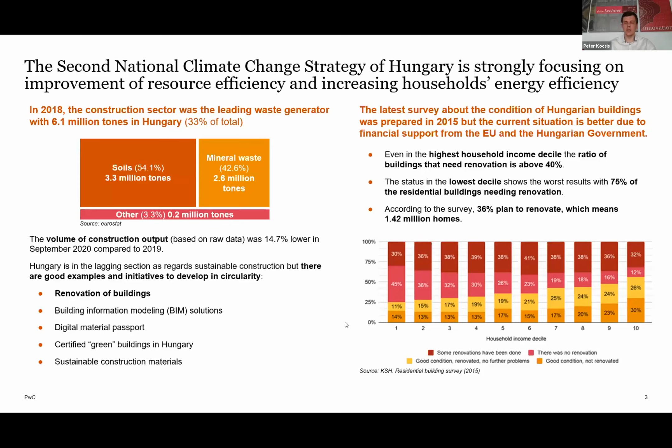In my last slide, I would like to highlight 3 potential market opportunities. Unfortunately, I would also like to highlight that the Hungarian construction sector is very cost sensitive and looking for cost-efficient solutions. So first of all,

if we're speaking about green building design, then we should also focus on cost efficiency. Those architects who have experience in BREEAM and LEED compliant designing could find those solutions which could release or decrease the capital expenditures. So it's really important to find those architects who have the relevant and enough experience to find green and cost-efficient solutions for building designing.

The other one is sustainable construction materials. As I mentioned, there are good examples and good practices regarding sustainable construction materials, but I would like to highlight that this market is in a very beginning phase.

I would like to just highlight one example. For example, MOL, the Hungarian oil and gas company, is producing rubber bitumen, which tries to recycle those used tires which in the other solution could be put into landfill. But in this case, they can produce higher life cycle bitumen which has better conditions and parameters.

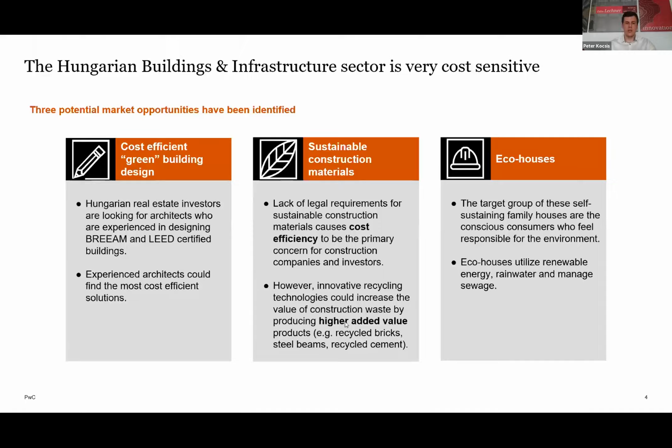So thank you very much. It was really just a brief part of our market analysis. I hope you found it useful.

Many thanks, Peter. Thank you very much for sharing those highlights. We could hear you talk about tremendous opportunity, because when it comes to the construction business within Hungary, there is just so much space for improvement. You made it very clear that it's also a cost-sensitive industry, especially when we're talking about households. At the same time, you mentioned some interesting figures, that over 35% of households are really planning on renovating. Money is available based on the funds from the European Union, but it's going to be also very crucial to find the right partners.

And the main opportunities that you highlighted are green buildings, so all the different certifications, how to make it more environmentally friendly. Then we heard a lot about space for improvement when it comes to green materials. And last but not least was definitely, especially for households, eco houses and opportunities and ideas over there. So thank you so much for highlighting all of that.

I'm also going very quickly through the questions, and there is an interesting one from Barry, who's wondering - you were talking quite a lot about households - is there also an opportunity for the industry, so commercial spaces, factories, and so on? Do you maybe have a brief insight into that, Peter?

Yes. We have some clients - not a huge number, but several clients - who are really trying to have these BREEAM and LEED certifications for their industrial buildings.

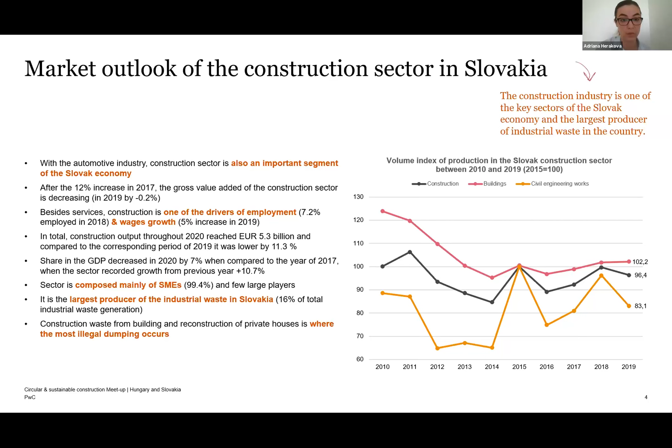I'm now moving to another slide. In the next 2 slides, I prepared some main points regarding sustainability practice in the construction and building sector. When looking at the sustainability trends, we can state that the sector in Slovakia is lacking in innovation and in use of recycled construction materials. The use rate of them is very low, below 10%, as you can see, and the recovery rate of construction and demolition waste is also very low, only 51% as of 2018. Also, as you can see in the graph, there is a huge lack of data regarding these kinds of groupings of the recovery or circular material use rate. So that is also one of the big issues which is not helping the market.

Traditionally, the construction sector in Slovakia is more conservative and less open to innovations when compared, for example, to the one in the Netherlands. So far, recycling construction material is not a major field of interest. The main overall barriers for these recycled materials usage is oftentimes price, which is higher many times than the price of native raw materials. Then there can be quality issues and the reluctance of planners and contractors to apply these recycled materials. So it's still a very traditional market, but it is changing.

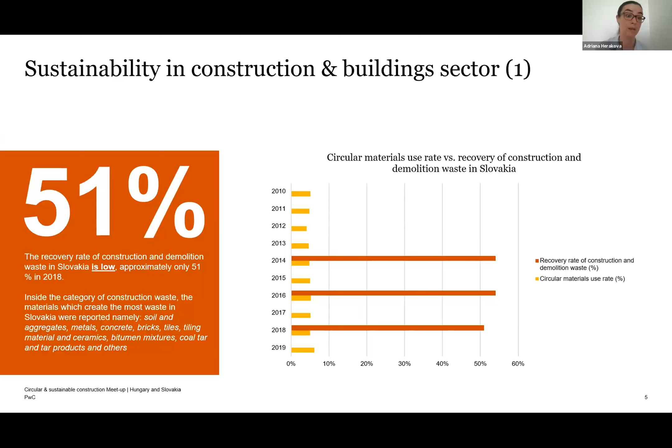When we move to the next slide, as already mentioned, the renovation rate of apartments and family houses is above average compared to EU countries. The country has been pursuing ambitious renovation programs for multi-apartment buildings, public buildings, and additional measures also focusing on family houses, such as insulation, etc.

What are the main obstacles? Oftentimes low income, low awareness about energy renovation, and lack of advisory services. However, policies are trying to support more and more the changing of opinions or the status of this.

The National Energy Climate Plan of Slovakia estimates that by 2030, 3 billion euros will be needed to renovate non-residential buildings, out of which 1.2 billion will be needed only for public buildings. So together with the Energy Efficiency Recovery Plan, they present a significant opportunity for action, which will be mentioned in a following slide.

Also, in terms of overall digitalization and data application usage, the construction sector is underdeveloped. I picked one example: only 13% of Slovak companies in the construction sector know and actively use BIM processes in their planning or construction processes. However, some private investors and developers in Slovakia are already using these advanced methods and technologies in their constructions.

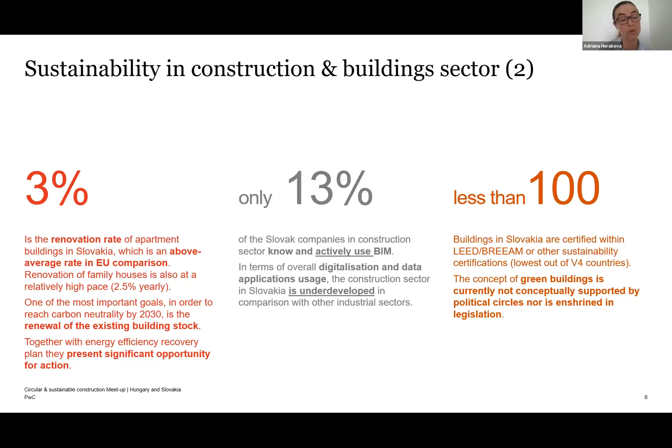When comparing Slovakia with other V4 countries in terms of green building certifications, Slovakia is at the lowest position. The concept of green buildings is currently not conceptually supported by political circles, nor is it fully enshrined in legislation. So also here is great room for improvement.

These are basically a summary of identified opportunities, not only but major, which came out after our market study. The first one, as I was mentioning, is the importance of disposal and recycling of construction waste. The development of new waste disposal sites with advanced recycling solutions will be required in Slovakia, as more waste, and construction waste especially, is expected to be produced. There is high demand for living space in Slovakia, and there are new constructions, so this is one of the areas which would be very important.

Second, we consider including knowledge exchange, especially in order to improve advanced technology usage, classification, and certification of buildings. This knowledge exchange should work especially between architects, investors, contractors, and municipalities, and of course between Slovakia and the Netherlands as an example and as best practice.

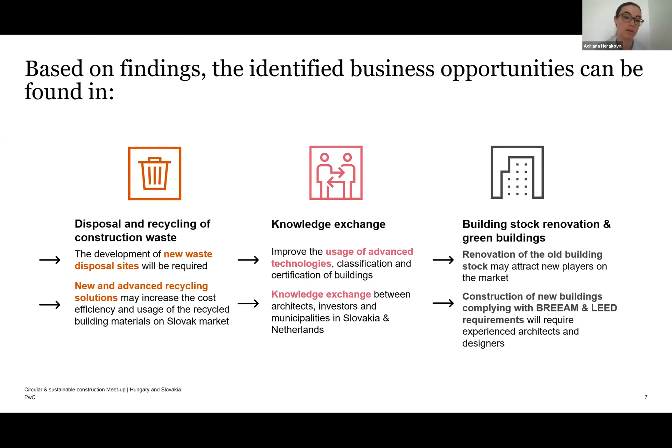And the third big opportunity lies especially in the renovation of the building stock and energy efficiency recovery plans for buildings. This is similar to Hungary. There is a need to renovate the old building stock and construct new buildings complying with BREEAM and LEED certifications. These BREEAM and LEED certified buildings are now currently being constructed more as office space, especially in Bratislava. So it is still not on a big scale; there are only a handful of projects like this in Slovakia.

And my last slide here, I pinpoint some potential partners. So of course, as mentioned, Slovak Green Building Council, Buildings for Future, BIM Association Slovakia, and many other private players, companies in the market, such as HB Reavis Group, Strabag, or YIT. So these would be the main ones, but of course not only.

And the funding - what I was trying to pinpoint here is that the Slovak government does not yet have a clear strategy for financial coverage of this transition, and therefore these green and circular initiatives are still oftentimes dependent on support from foreign investment in Slovakia. So yes, it's not fully enshrined.

However, there are various subsidies and loans going on for green projects. These could be obtained from, I don't know, the Visegrad Fund, Norwegian grants, European banks, many other programs, and also from the Operational Program Quality of Environment, which is run by the Ministry of Environment in Slovakia. So that would be it - that was a very fast and very quick overview of what you can find further in our market study.

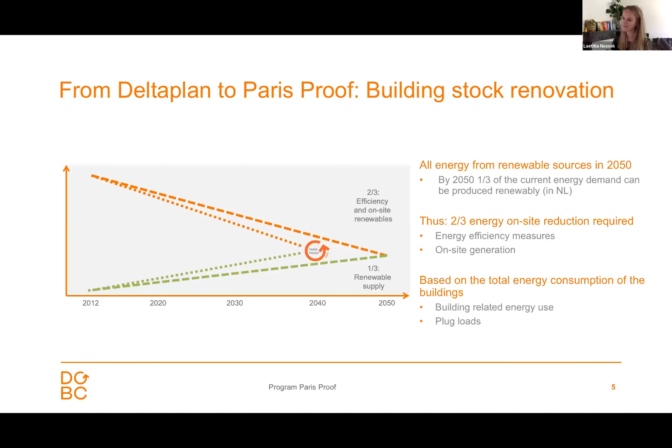First, I want to dive a bit deeper into our Paris-proof theme, because I heard in Hungary and in Slovakia, the renovation wave is a challenge. We have built a Deltaplan to show how you can renovate existing buildings, primarily utilities, not focused on houses. Here we say that to be Paris-proof, you have to reduce your operational energy use by two-thirds to stay within the Paris-proof budget, and this has to be done by 2050, but we want to be a bit more ambitious and do this by 2040.

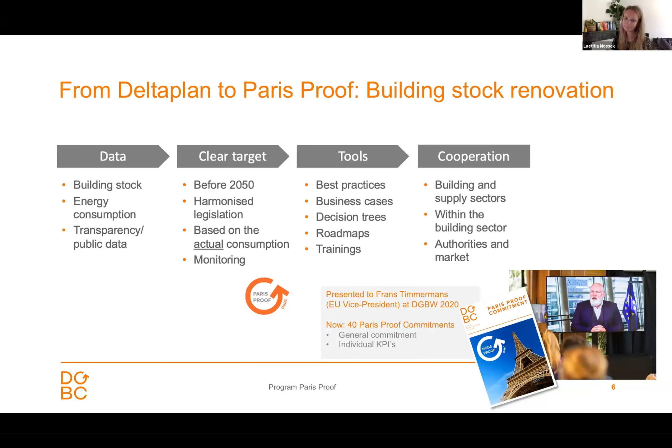How do we do this? We set clear targets, build tools, and cooperate with the building sector to really pinpoint it into the different sectors. At the moment, we have 40 Paris-proof commitment signees - companies that have signed this commitment and are building and renovating their building stock. Also nice to say, we presented to Frans Timmermans, and he was really pleased with this, so it might be a look-through for a European strategy. The tool we built is the actual energy intensity indicator, where you can calculate what your actual emission is for your building.

So I saw the renovation challenge, and I thought it would be nice for you to see how the Dutch Green Building Council is doing this, but also that we have a lot of committers that can maybe also translate this to other markets.

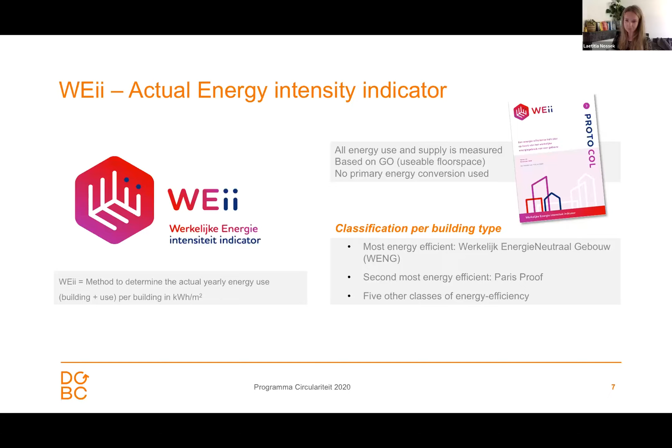Then I want to dive a bit deeper into the circular economy part. We have developed a strategy framework with a definition of a circular building - that is a building that is developed, used, and reused without unnecessary resources depletion, environmental pollution, and ecosystem degradation. There are some topics in this, and we also map this onto our BREEAM system to really see how you can apply this to the building sector.

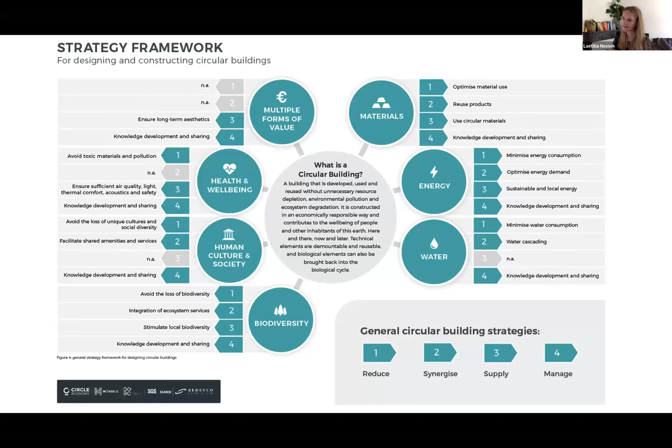Besides that, we have a circular program with 3 pillars to boost the circular economy in the building sector. We do this through measurability, defining indicators and making clear what circularity actually means in the building sector. We also do this through boosting the circular construction economy via the financial part, business cases, legal, and procurement, but also implementation. I think that's why we're all sitting here today, to see what you can actually do and how you can reduce the environmental impact of the construction sector.

I also want to share some of our reports. If you're thinking about circularity and making it applicable in buildings, you can look at releasability indicators - really looking at how you can build a building and reuse every part of it by thinking about the different aspects of the building and how you can take it apart again, so that all the materials can have a second life. We have a framework where all of this comes together, and we recently released a framework for circular buildings for existing buildings as well, referring to the renovation wave, to see how you can implement this.

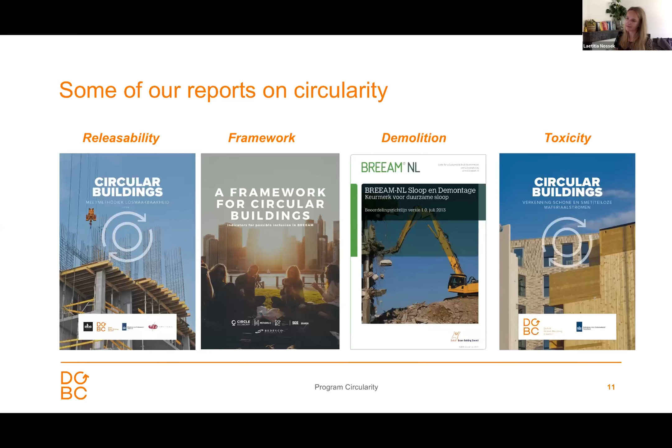Setting the scene a bit, maybe to look into why this is important for Dutch construction architects and owners. In the Netherlands, we have the Environmental Performance of Buildings regulation, the MPG, Milieuprestatie Gebouwen. This has been mandatory for an environmental permit since 2018 for new houses and offices, and in the MPG we actually calculate shadow costs.

We have 19 indicators, and with these we calculate the fictive costs of the environmental impact. The target was €1 per square meter in 2018, and we now have a new target of €0.8 per square meter. The thought behind that is that if you go lower, your environmental impact also decreases. We want to push this into reducing it even more, of course. We also have this indicator in BREEAM-NL.

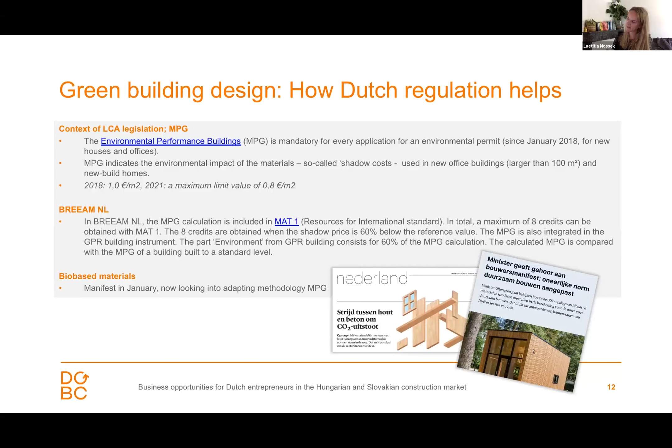For our Dutch listeners, maybe they already know this, but in January there was a manifest on bio-based materials, really to boost more sustainable materials. This has sparked the discussion on the MPG and how you should calculate this. We are also looking with the market at what everybody thinks about this, and how we can boost the methodology and really boost sustainable materials.

One way to also reduce materials is through the material passport - it's also indicated as a market opportunity. In the Netherlands, we have a material passport called Madaster, introduced by an architect a couple of years ago. With this material passport, you can show the different materials in your buildings and put this in your BIM, so that if the building's lifespan is over, you can quickly see how to reuse all the different materials. Madaster is also working internationally, so that might be interesting. There are a couple of others, but this is the most known in the Netherlands.

Another way to do it is through urban mining - really to see how one building can be used for the next building. The most known party in the Netherlands is New Horizon. Their slogan is that they harvest materials from old buildings and put them into new ones. This is a really nice example of how you can reduce construction waste.

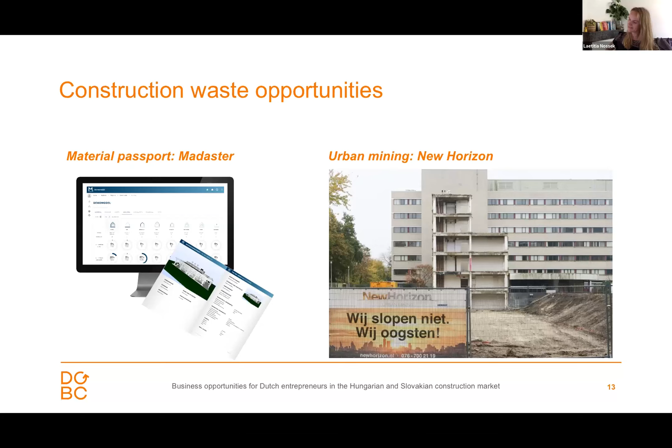I wanted to show you two projects using urban mining. Biopartner 5 - what they did is they took one lab and actually reused the whole steel construction, putting it 750 meters apart from the old building. So they reused the whole construction, and in this way drastically reduced their environmental impact. They did this not only for the steel construction, but for 50% of all materials, and the other materials were also sourced through waste streams and similar methods.

And Laetitia, sorry, just for the sake of timing, just to give you a heads up, if you could give us the highlights of this project - it's super interesting, but we'd like to move on to the other topics afterwards. Many thanks. Yeah, of course, I'm almost done.

So the steel construction was actually the most highlighted part - it was really the base of the whole building. Another nice example is Lidl Almere Oosterwold. They are net zero carbon on the operational and the material part, and they achieve this through offsetting on site. They have some bio-based parts built into their site, and they really thought about how to use bio-based materials throughout the construction.

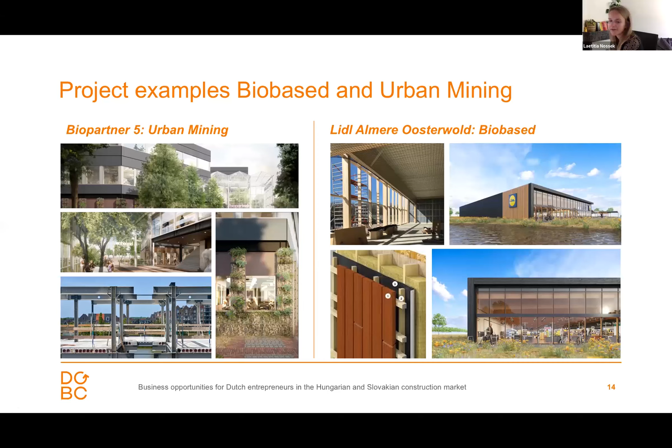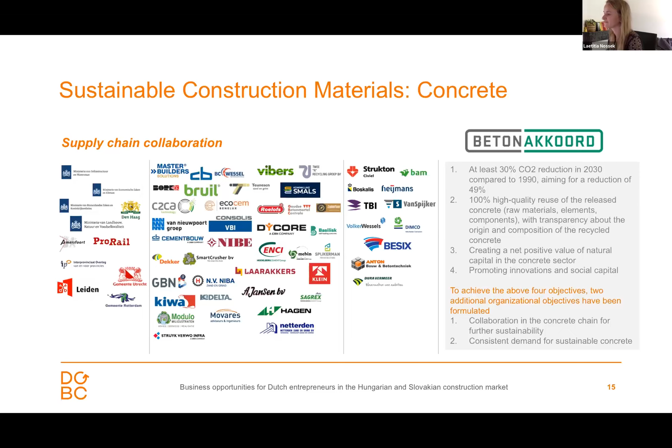And that's it, so I'll give my time back to you, Andrea.

Thank you, many thanks Letitia. I just got to say, for instance this last slide we're looking at, I do believe that was the rooftop terrace of Accenture, where I had the opportunity to spend quite a lot of years. So it's fun to see all those beautiful images coming back of Zuidas Accenture rooftop terrace.

Indeed, Lidl and everything you've been mentioning - thank you so much for walking us through that. It's very obvious that within the Netherlands, the whole market and policy in place, the life cycle analysis legislation, all those are fantastic tools really helping the market become more circular and sustainable. Many thanks for highlighting that. Again, I'd like to remind that you shared a couple of studies that are in place, and it really feels like those studies perfectly match the gaps identified in both Hungary and Slovakia. So I highly recommend looking at those publications, either through the Dutch Green Building Council website or by getting in touch directly with Letitia.

Many thanks for all the presentations. This first part of our session was about what do we see, what are the gaps, where we need to collaborate more, what are the opportunities. Now in the second part, which will be more interactive, we're going to move into real examples - what are the actual experiences of Dutch entrepreneurs already active in the markets in Slovakia and Hungary. I'd like to encourage any Dutch entrepreneur with a good idea, especially if you can see how you could help fill those gaps in the Slovakian and Hungarian markets, to raise your hand - we'll have space for a pitch and we're very keen to hear from you.

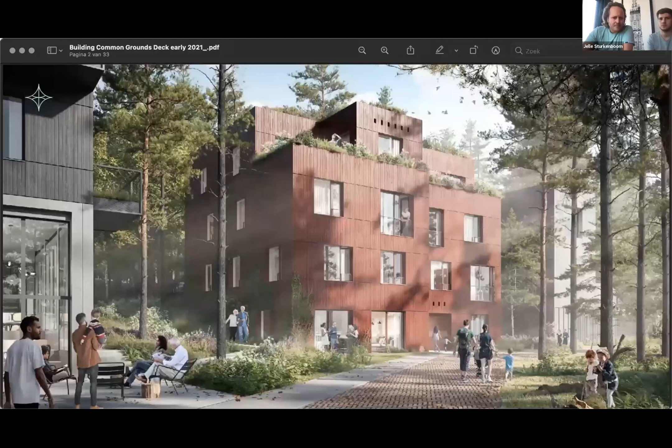Just let me share the screen so we can give you some image of what we're doing. We are developing an ecosystem of partners working on a blueprint for future living from our lighthouse project, named Common Woods, which will be developed in Amersfoort, in the middle of the Netherlands. I'll briefly take you through this. If anyone is interested, we can send it through mail. I'll go through it really fast, otherwise it'll take half an hour.

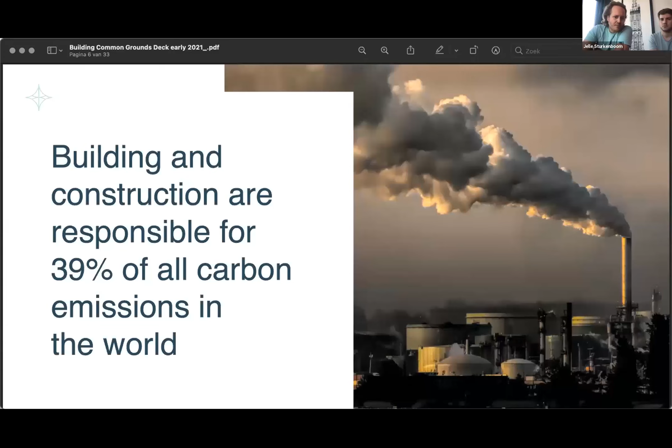We all know we've lost 60% of biodiversity in the last 50 years. We're coping with a huge housing shortage worldwide, and building and construction are responsible for almost 40% of all carbon emissions in the world. Besides that, we take a bit more holistic approach, because we also see that around 30 million Europeans frequently feel lonely. We believe we need a new form of hybrid social-ecological urbanism to tackle that issue, and to transition this world from the ego-based paradigm to an eco-based paradigm.

To help get this started, because we can only do this together, we created a cooperation between the companies now working on Project Common Woods, setting this out as a blueprint for future living. This is quite interesting because it gets the highlights into one image. It's based on community building and participation, so we are creating the boundaries of these new projects together with all stakeholders, speeding up urban processes enormously.

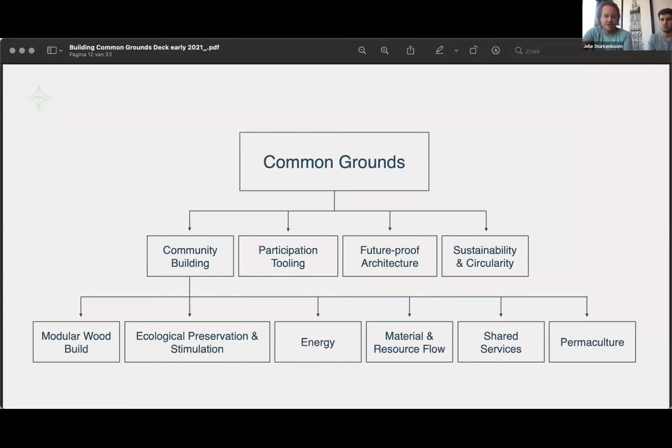Tackling issues to implement really future-proof architecture and sustainability and circularity within the regulations we all have. Building modular in wood, preserving ecological environments, and stimulating new forms of energy, material and resource flow. And really important also, shared services.

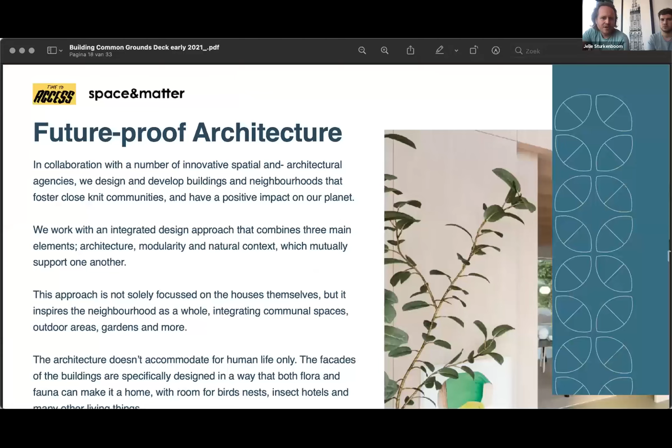I'll just take you through the companies we're working together with, really fast, to this image that really shows the inclusivity of our new hybrid form of urban development, and the partners we're working together with now. We're open for international new partners. Just received a nice EU React EU subsidy to work on an international program also.